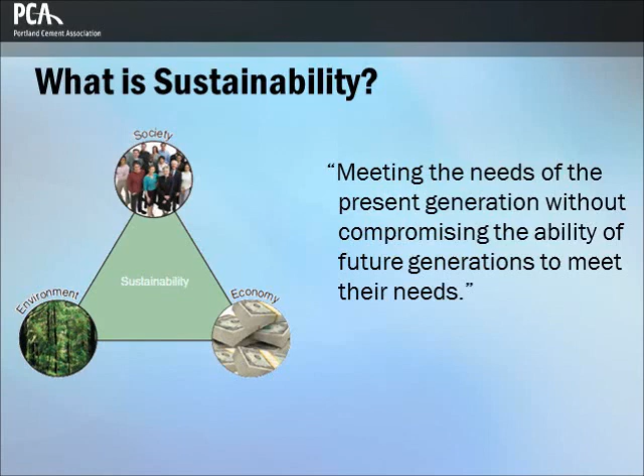This chapter will provide an introduction to sustainable development and concrete's role in sustainability. In the pioneering report of the World Commission on Environment and Development, Our Common Future, sustainable development is defined as meeting the needs of the present generation without compromising the ability of future generations to meet their needs. Embedded in the concept of sustainability is a balance of social, economic, and environmental principles.

The leading nationally recognized sustainability programs focus primarily on energy conservation and atmosphere, water management and resources, site selection and development, indoor environmental quality, and material quality and resources. Another factor increasingly coming into play is functional resilience, the ability of a structure to serve the original purpose and be adapted for future use.

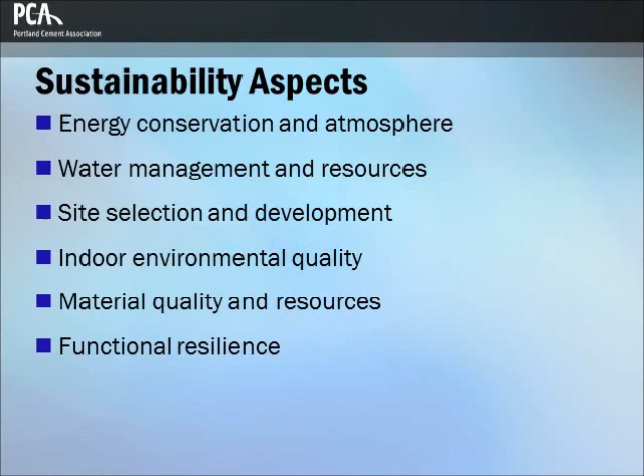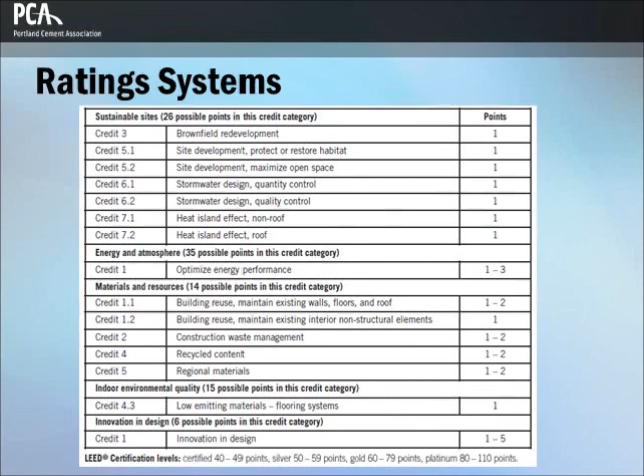Several organizations have developed rating systems that attempt to quantify improvements in green performance. For example, concrete use can contribute to credit in 15 categories in the United States Green Building Council's Leadership in Energy and Environmental Design for new construction and major renovations.

The principle of sustainable development. The principles of sustainable development are easily incorporated in the design and proportioning of concrete mixtures and exhibited readily through applications and service.

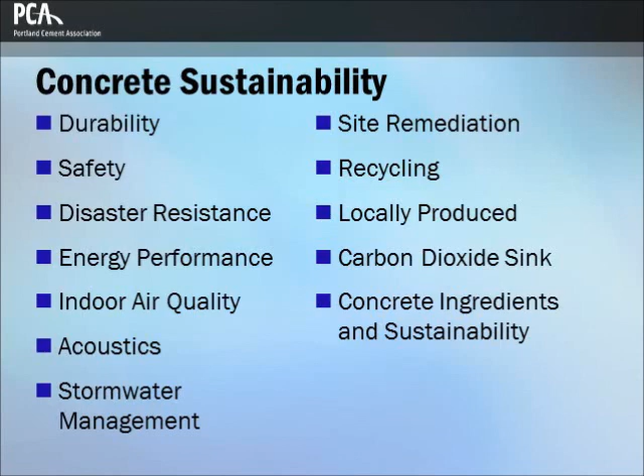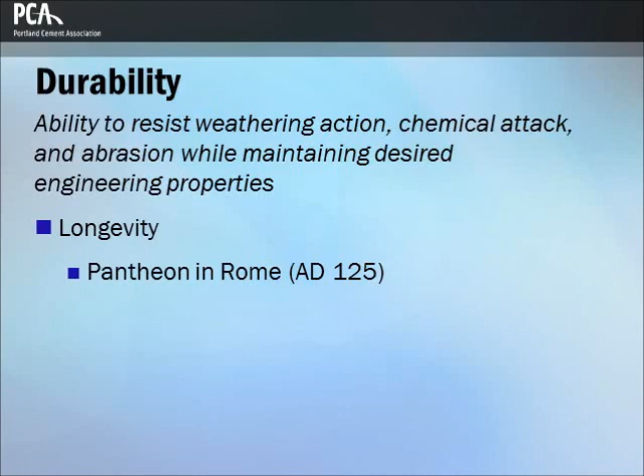Durability is one of the most important contributions to sustainable development. This translates directly to longevity of the structure. A structure that satisfies the needs of several generations is considered a sustainable development.

Properly designed reinforced concrete is resistant to storms, floods, fire, and earthquakes. These structures can also provide blast protection for occupants. The concrete home shown here, still standing, survived a tornado in Wisconsin.

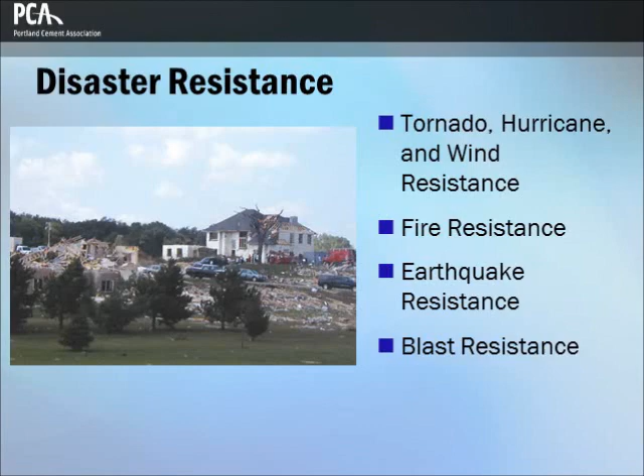Concrete can enhance overall energy performance in several applications, including thermal mass, fuel consumption, heat island reduction, and lighting efficiency. Insulating concrete forms, shown here, provide thermal mass and high levels of insulation, key components for net zero energy buildings.

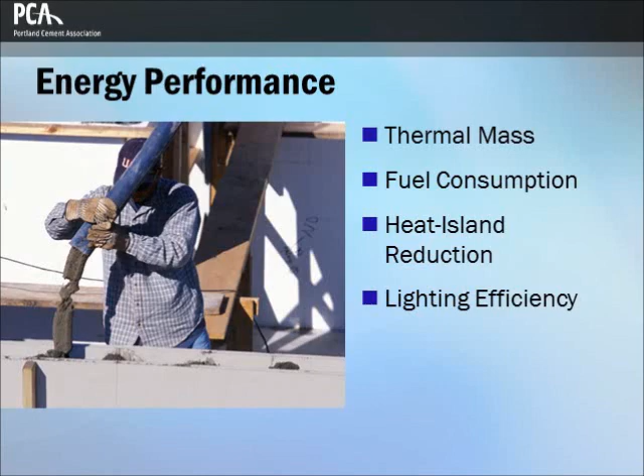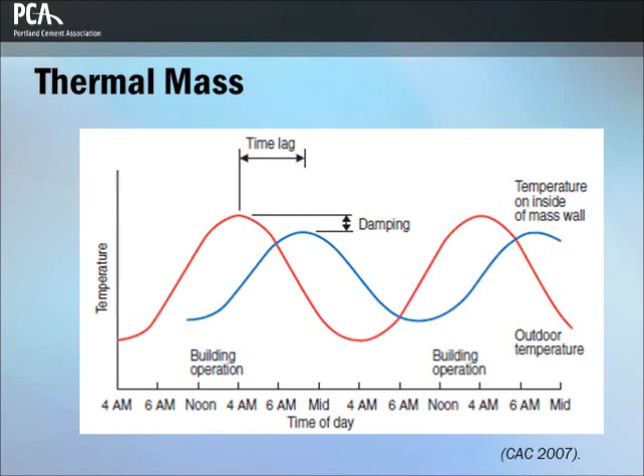Studies demonstrate the lower fuel consumption for vehicles traveling on concrete pavements. Current research shows an improvement between 1 and 11% for heavy trucks and 3 to 17% for smaller vehicles.

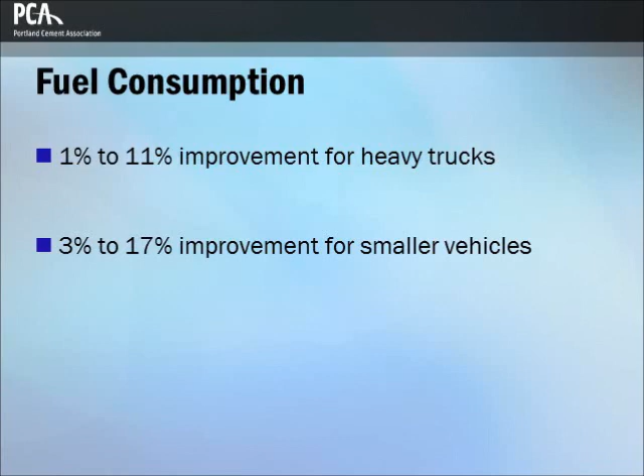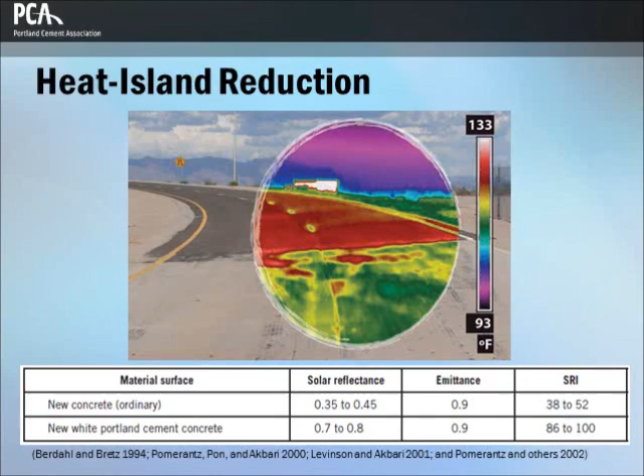Light-colored concrete materials have higher solar reflectance, also called albedo, which reduces the heat island effect. The picture here shows a thermal image of a pavement transition in Mesa, Arizona. Note the temperature difference between the concrete pavement and the asphalt pavement. The SRI of new concrete greatly exceeds the threshold value of 29 for most green building standards and rating systems.

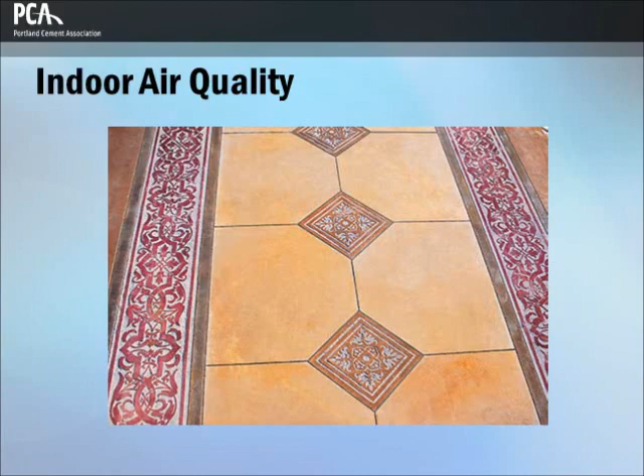Concrete contains low to negligible amounts of volatile organic compounds. Decorative concrete flooring, created using a sandblast stencil technique, eliminates the need for carpeting or other flooring materials that can impair indoor air quality.

Concrete can provide excellent acoustical control. The STC value is roughly the number of decibels that sound is reduced going through the wall. Cast unfinished concrete has an STC ranging from 44 to 58. If the wall is then dressed with furring, insulation, and wallboard, the value jumps to as high as 63.

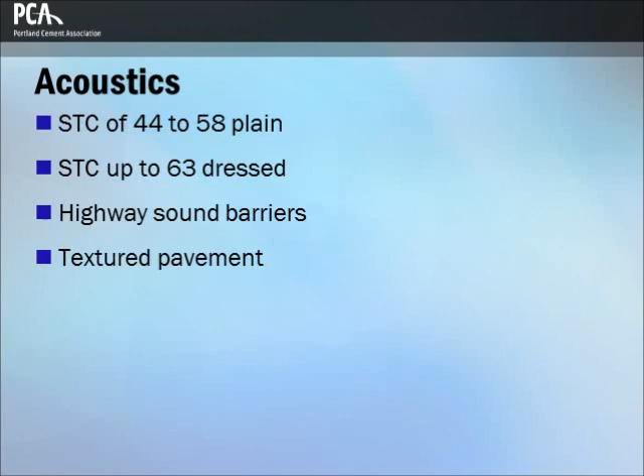In addition to building acoustics, concrete is used as highway sound barriers, and many methods have been developed to produce quiet concrete pavements.

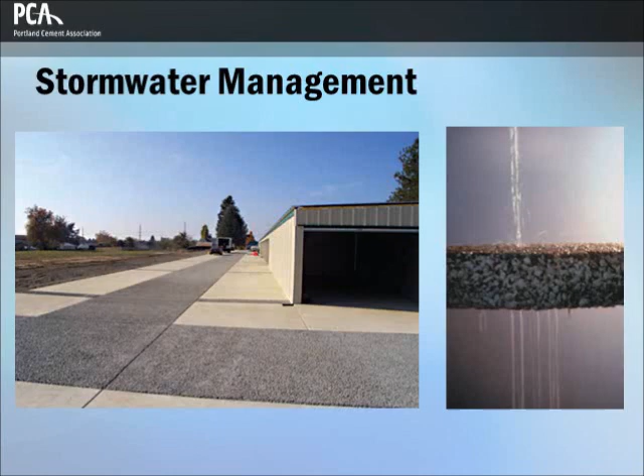Pervious concrete allows for infiltration of water, reducing runoff from the site. The image on the right shows a side view of water percolating through pervious concrete.

An alternative to pervious concrete is a permeable grid paver system. Interlocking concrete pavers allow water to infiltrate between the units.

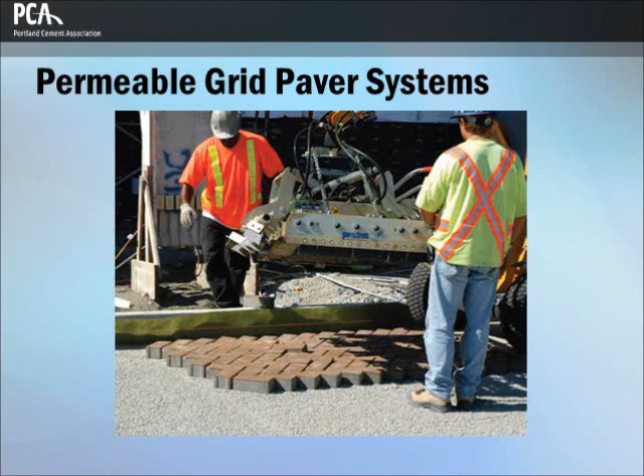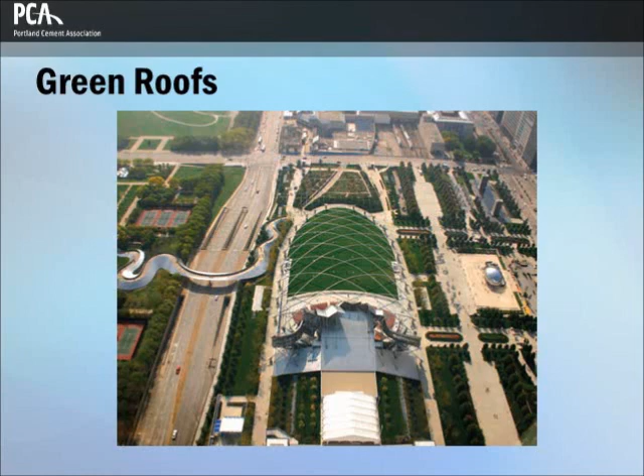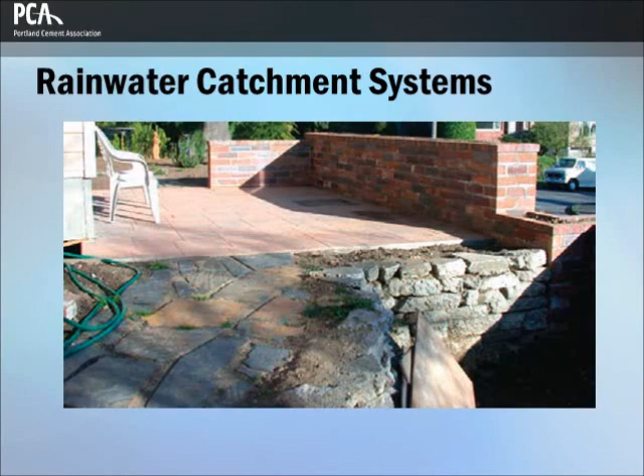Concrete cisterns collect rainfall and store it for later use in non-potable applications, such as toilet flushing and irrigation. Treatment systems can purify the rainwater suitable for drinking, bathing, and other potable uses.

Cement-based solidification stabilization treatment is well suited for remediation of brownfields and has been successfully implemented in a number of brownfield sites.

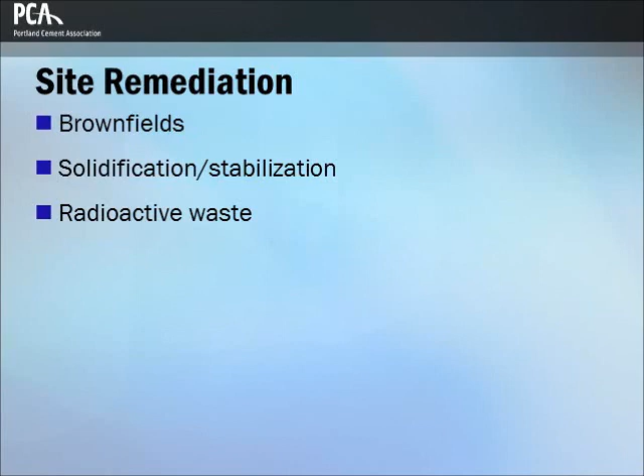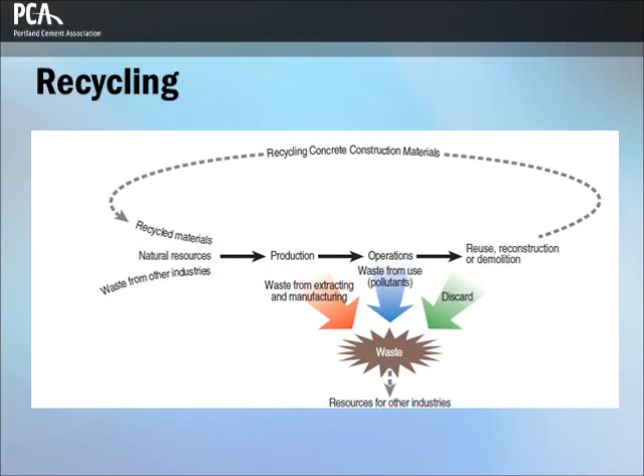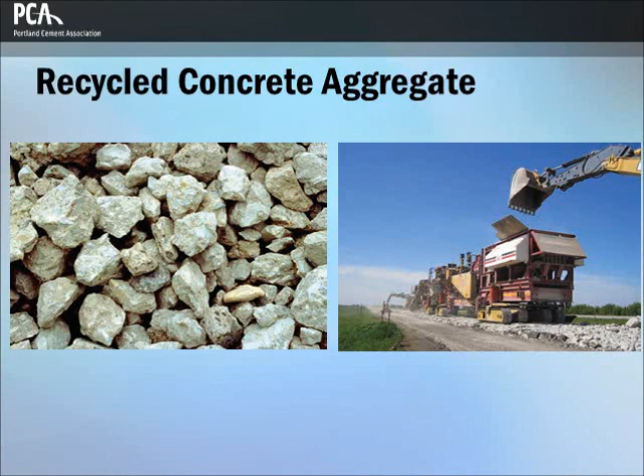Many concrete materials can be recycled after initial use. Concrete from demolished structures can be recycled and is commonly reused as fill or road base. Paving trains can recycle existing concrete pavement. The crushed concrete can be used as aggregate in new concrete or as base material.

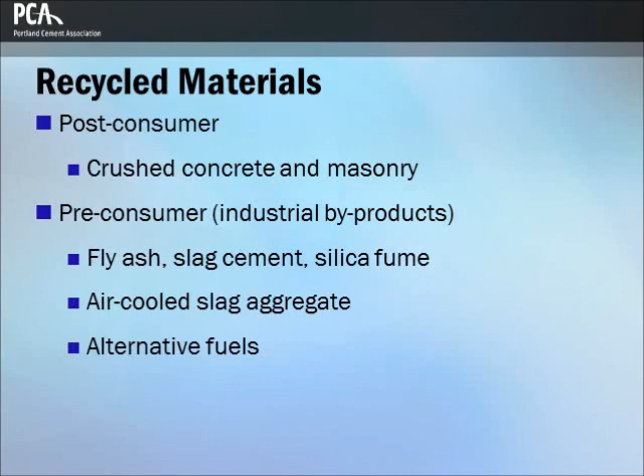Many concrete structures already incorporate one or more forms of pre-consumer recycled materials in the form of industrial byproducts. Also, many cement plants utilize industrial waste and discarded tires as alternative fuels for the kiln.

Most of the components of concrete are manufactured within 500 kilometers or 300 miles of a concrete plant. Most ready-mix concrete plants will be within 150 kilometers or 100 miles of the project site. These short distances minimize fuel requirements and associated energy and emissions from transporting and handling.

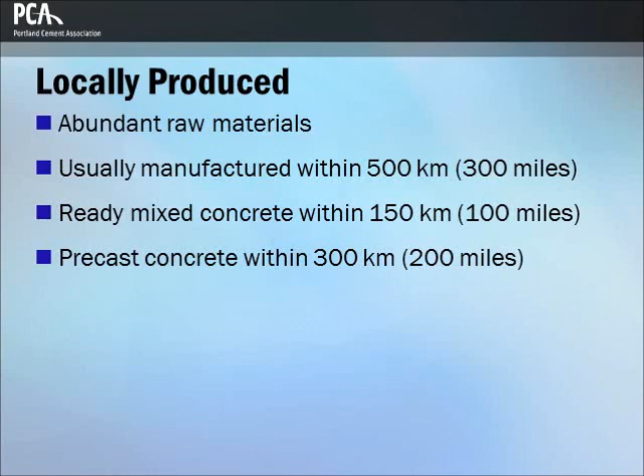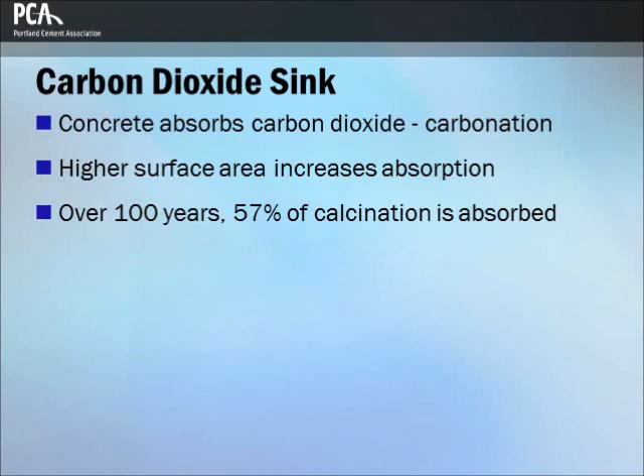During the life of a concrete structure, the concrete absorbs carbon dioxide in a process called carbonation. This may be viewed as a loop in the carbon life cycle, as it reabsorbs much of the carbon dioxide that was released during the calcination of limestone in the cement manufacturing process.

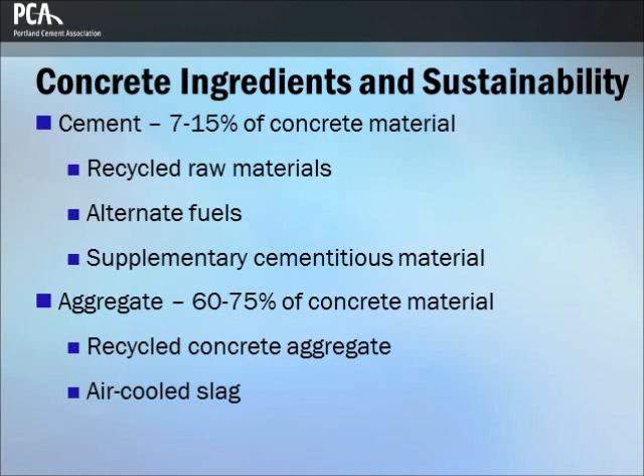A key benefit of concrete is the ability to modify the concrete constituents and proportions to best meet the sustainability goals of a particular application. 2 examples are cement and aggregate. Both of these ingredients can utilize recycled materials.

Life cycle analysis is a tool used to select building materials and influence design choices. A life cycle cost analysis is the practice of accounting for all expenditures incurred over the service life of a particular structure.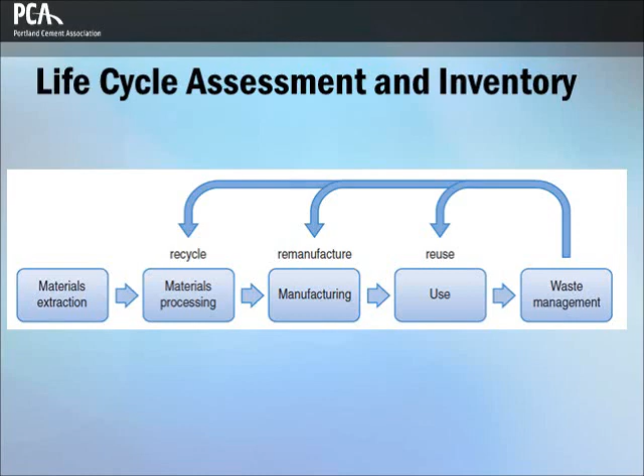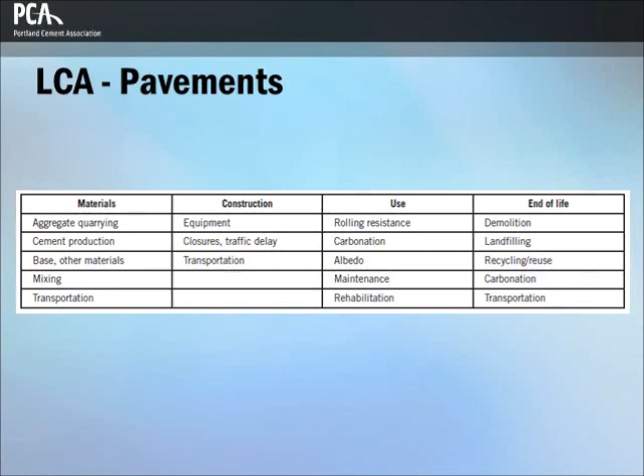An LCA provides a consistent methodology applied across all products and at all stages of their production, transport, use, and recycling at end of life or disposal. This table demonstrates the life cycle phases and components for concrete pavements. This table demonstrates the life cycle phases and components for concrete buildings.

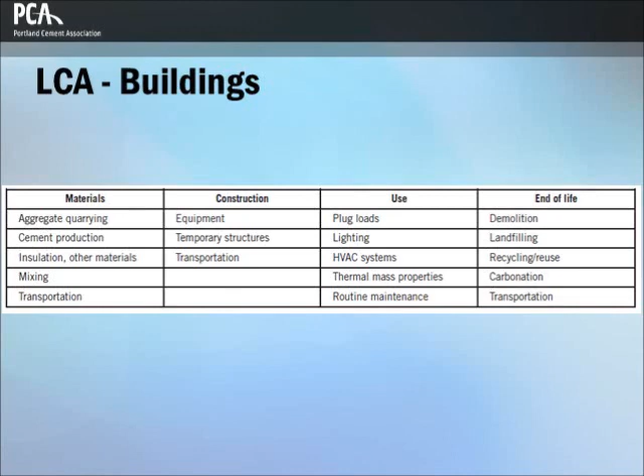At the Massachusetts Institute of Technology Concrete Sustainability Hub, a team of professors, researchers, and students are using LCA to evaluate and improve the environmental performance of buildings and pavements. Preliminary analysis from MIT indicates that the operation components of the infrastructure, primarily heating and cooling systems for buildings and rolling resistance for pavements, hold the most potential for large-scale improvement.

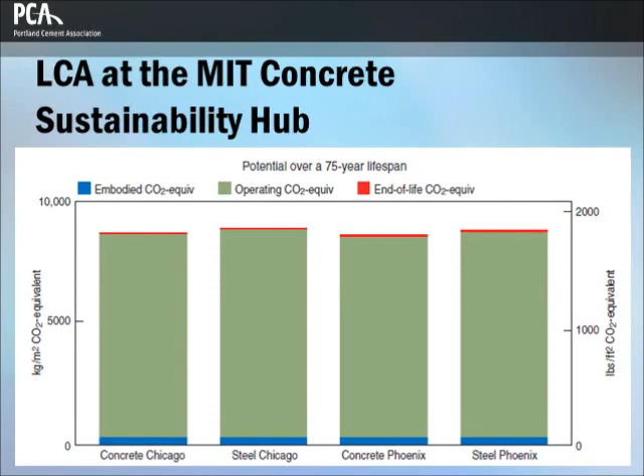In summary, this chapter provided a brief introduction to the principles of sustainability and sustainable development, and briefly touched upon the sustainable development rating systems that are used today. It covered in brief detail a variety of ways in which concrete passively and actively is involved in sustainable development, and then closed out with a discussion of life cycle analysis.